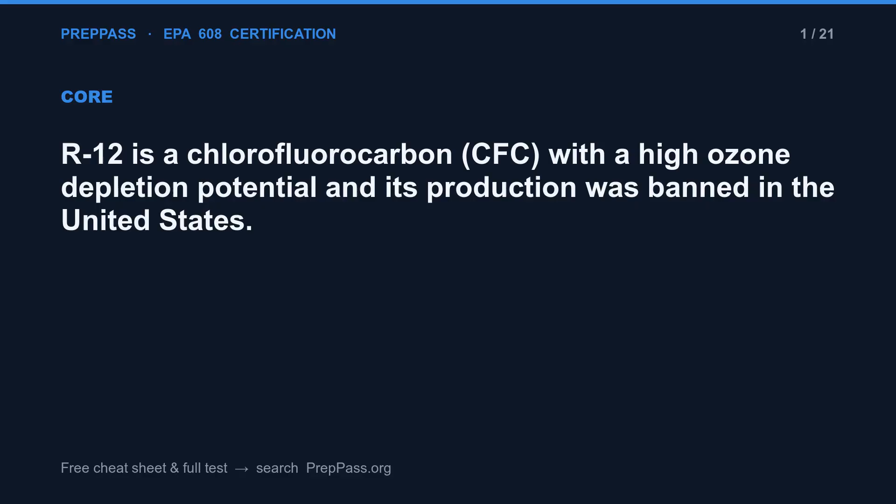Let's go. R12 is a chlorofluorocarbon, CFC, with a high ozone depletion potential, and its production was banned in the United States. Bolt-on saddle piercing valves rely on a rubber gasket that can dry out or degrade over time, creating a slow leak. Type 1 certification covers the service and disposal of small appliances.

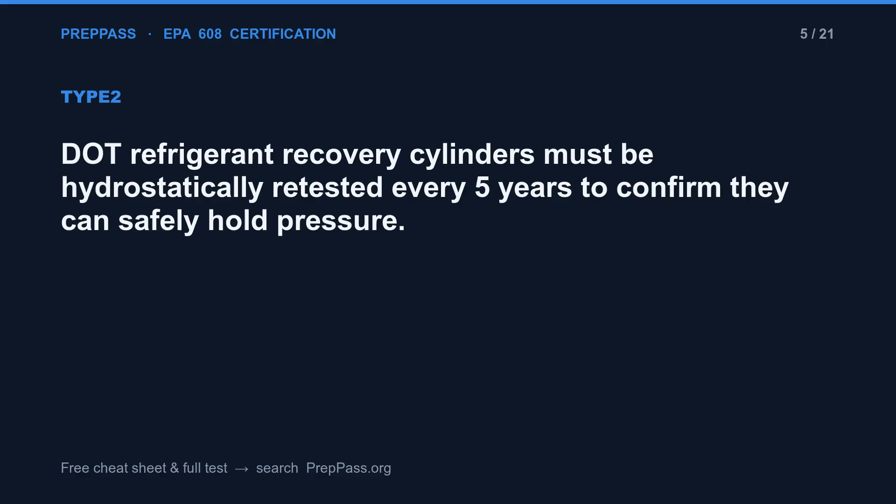Refrigerant recovered on site may generally be recycled and returned to equipment owned by the same owner. DOT refrigerant recovery cylinders must be hydrostatically retested every 5 years to confirm they can safely hold pressure. The standard color scheme for a refrigerant recovery cylinder is a gray body with a yellow top, shoulder.

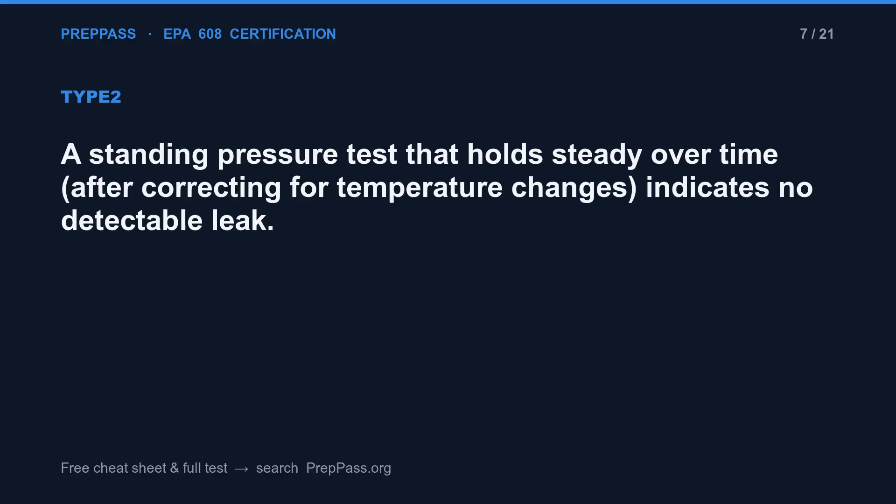A standing pressure test that holds steady over time, after correcting for temperature changes, indicates no detectable leak. Low-pressure appliances must be evacuated to 25 mm of mercury absolute, a deep vacuum roughly equal to 29 inches of mercury vacuum. HCFC 123 is a classic low-pressure chiller refrigerant, along with CFC 11 and the newer HFO R1233ZD.

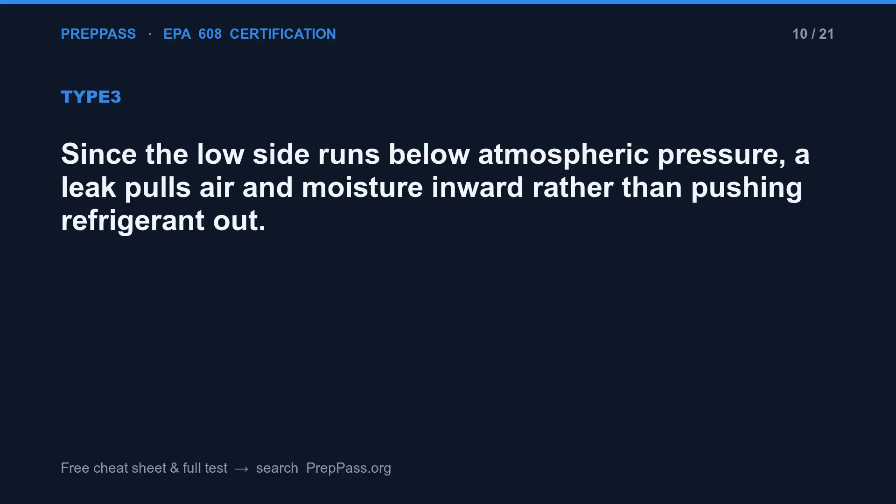Since the low side runs below atmospheric pressure, a leak pulls air and moisture inward rather than pushing refrigerant out. A rising purge rate means air is leaking into the vacuum side of the chiller, so the purge unit runs more often to remove it.

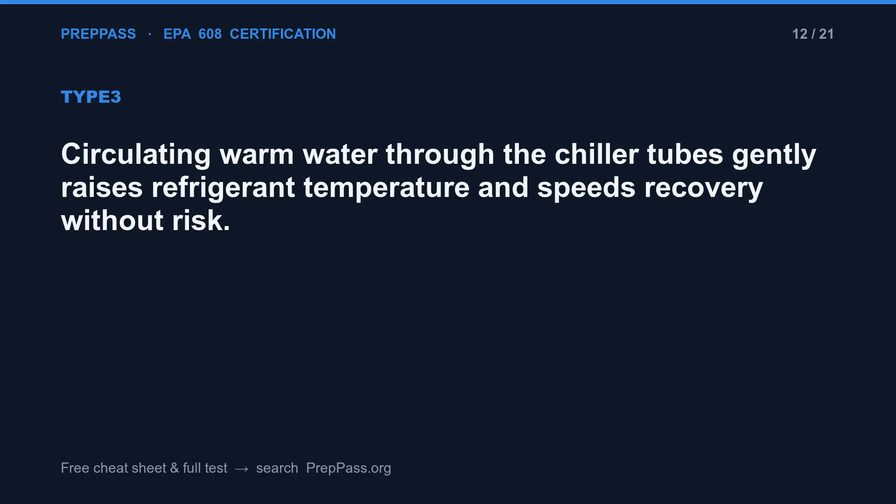Circulating warm water through the chiller tubes gently raises refrigerant temperature and speeds recovery without risk. A float valve meters refrigerant flow to maintain the proper level in a low-pressure chiller. R1233ZD is a low global warming potential HFO refrigerant used as a replacement for HCFC 123 in new low-pressure chillers.

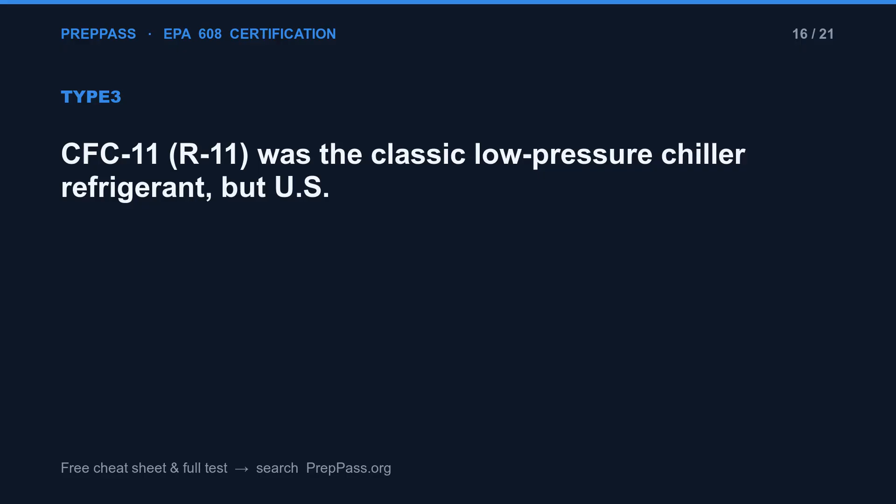Leak test pressure must stay at or below 10 psig to remain safely under the roughly 15 psig rupture disk. CFC 11, R11, was the classic low-pressure chiller refrigerant, but U.S. ... Refrigerant vapor is heavier than air and can pool near the floor of a machine room, displacing oxygen and exposing workers.

HFC 404A is a high-pressure blend used in commercial refrigeration, not a low-pressure chiller refrigerant. Recovery is removing refrigerant from an appliance and putting it into a container in any condition, with no processing. Only an EPA-certified reclaimer may reprocess refrigerant to AHRI 700 purity and resell it. The fill level must be determined by weighing the cylinder on a scale, since the 80% limit is by weight.